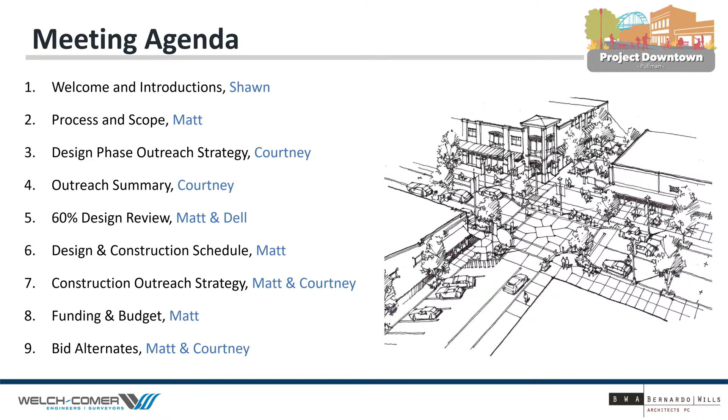You've all seen this slide a few times now - just a quick reminder that this is a long process. The lifetime of this project is measured in years at this point. Where are we at? We published the master plan a couple years ago, finished the concept design early last year, and now we're in the throes of the design phase, with every intent to be building something this late spring and summer. I'll show you a schedule here fairly quickly.

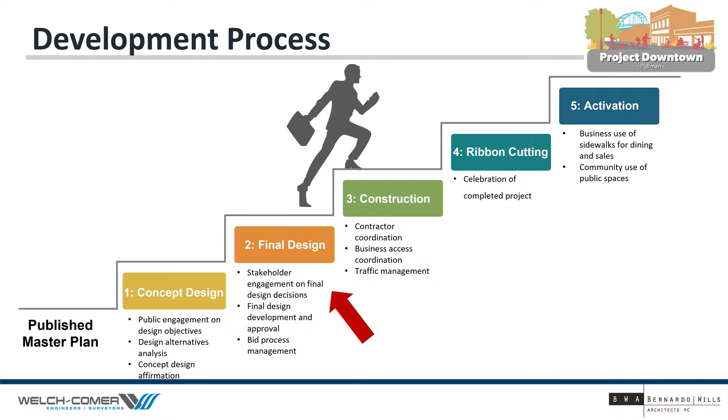From a scope standpoint, again, I won't belabor this too long since we've talked about it many times. I'd say the premier project - in terms of cost and length of time from a schedule standpoint - is Main Street. That's the main project. We also have Grand, which is mostly everything but the asphalt, so the sidewalks. There's also some trail work up on Davis, some work on Olsen Street, which I'll get into as we go through the presentation, Pine Street Plaza, and then pavement marking changes on Pine and Kamiaken, which is what we talked about last time. I remember it was really cold outside when we last met.

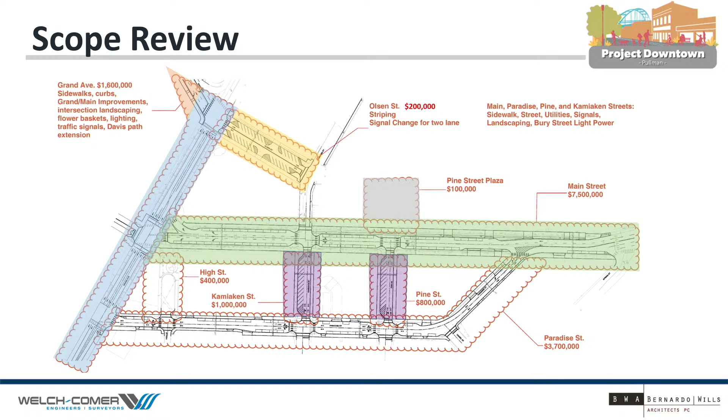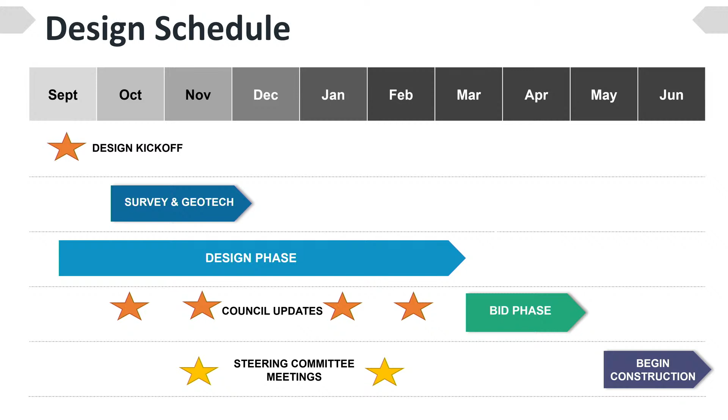From a design schedule standpoint - this is not the construction schedule - we're right in the middle of January. This is our third presentation before you, our third update. Later this month we'll go back to our design steering committee and ask them for specific feedback on things like what the lights should look like, and what color palette our surfacing should be, whether colored concrete or clay paver. A lot of those details, we're finally getting into. Then we'll be back before you the last day of February for what we'll call a 90% presentation and essentially an authorization to go to bid. Then we'll bid, and probably start construction shortly thereafter, which I'll cover later on.

I'm going to quickly turn it over to Courtney to talk about our engagement during the design phase. Good evening, Mayor Johnson, members of the Pullman City Council. It's a pleasure to be here with you in this new year. As you'll recall, Phase 2, the design phase public engagement, is primarily focused on raising community awareness and anticipating and mitigating construction challenges, doing that in a way that is very collaborative with the stakeholders, the steering committee, and the council.

This is a time for our consulting team to work with those property owners who will be impacted, to make sure that they're aware of opportunities they might want to take advantage of, like putting in a fire line or a grease trap interceptor if they're thinking about enabling a restaurant use in their building. It's also a great time to work with our partners at the City of Pullman.

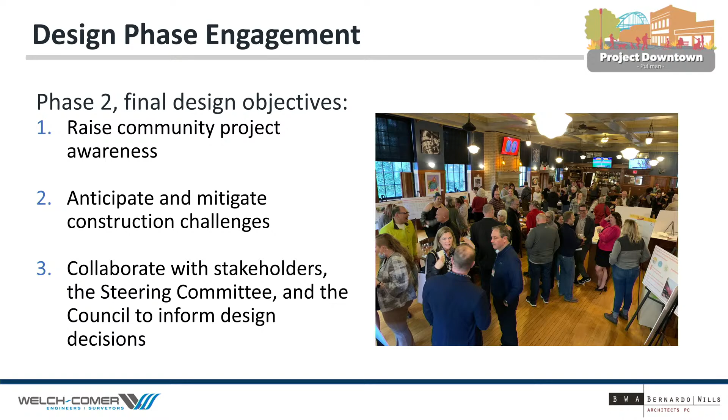I'd like to thank Jennifer Hackman, the City of Pullman's Economic Development Manager, Marie Dymkoski at the Pullman Chamber, and Holly Greystone at the Downtown Pullman Association for their thoughtful and proactive collaboration on making sure your downtown businesses have all the tools available to anticipate the impact of construction. It speaks to the care those professionals put into their community that we're meeting every other week to touch base about what tools and resources are available, and asking those stakeholders what they might need that we could find resources for.

With regard to those steering committee meetings, we're working through final design and construction phasing recommendations. We appreciate the opportunity to work with the steering committee. They have an inherent knowledge about the neighborhood that is really helpful for us. The stakeholder engagement has been really effective.

Some of you attended a really great meeting here on December 14th with property and business owners to talk about both the design elements, but also looking ahead to what construction looks like. We're still at a point where we can predict and anticipate challenges and swerve to avoid them, so to speak, because there will always be challenges during construction. Through that engagement, we're really able to identify hurdles and work to overcome them.

The community will see general updates soon on the website, and these city council presentations are a really effective way to let the community see the process that we, the City of Pullman, and your consulting team have gone through to get to this 60% complete design.

With that, I'm going to turn it back over to Matt, and just say that we've got some really fun images to show you.

Thanks, Courtney. So as I mentioned, we're about 60% of the way through design, and in most projects, early in design, we get to show beautiful pictures and concepts and whatnot. As we move deeper into the nuts and bolts, the products tend to get more utilitarian. It doesn't mean they're not important - they're very, very important, just sometimes less flashy. So we spent a little extra time developing some ways to show our progress, rather than just a black and white set of plans.

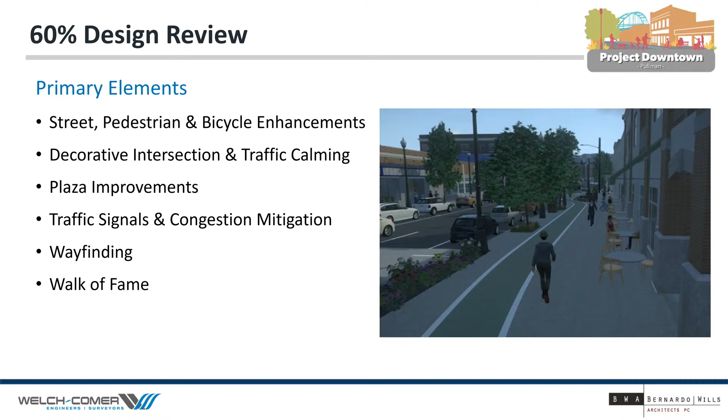We'll go through several of these items. Some of them will be plans like this, but I'm going to cover Main Street first, and I'm just going to talk about what's between the curbs. Really what that means is the curb alignments, the center line alignment, and the lane configuration.

If you remember, there are going to be some changes to the lane configuration. We will keep 3 lanes on Main Street between Grand and Kamiaken, but then we transition to 2 lanes as we head east. I realize that's opposite to traffic, but we're 2 lanes from Kamiaken to the very east end of the project.

There are several changes to the curbs at the intersections where we've introduced curb bulbs to better define where the parallel parking lies, and also to shorten the crosswalks, as we've discussed before.

One item I'd like to point out in green here is the bike lane. We've worked very closely with the DOT and staff to figure out how to accommodate multi-uses, and bicycles are certainly one of those. The design ended up landing where the bike lane is up on the sidewalk in a specifically delineated facility. It does venture back onto Main Street at Kamiaken, and then they're pointed north on Kamiaken to push them up to campus.

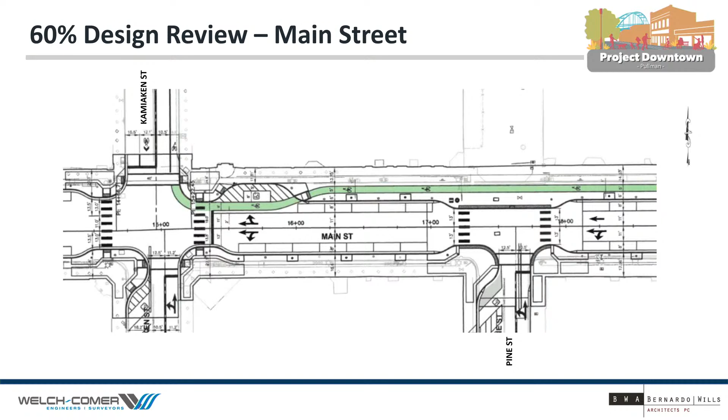Some of the questions were, well, why doesn't the bike lane stay on Main Street all the way to Grand? From a safety standpoint, and the DOT agreed, that just wasn't a safe situation. So this is what we feel is the best solution from a bike facility standpoint.

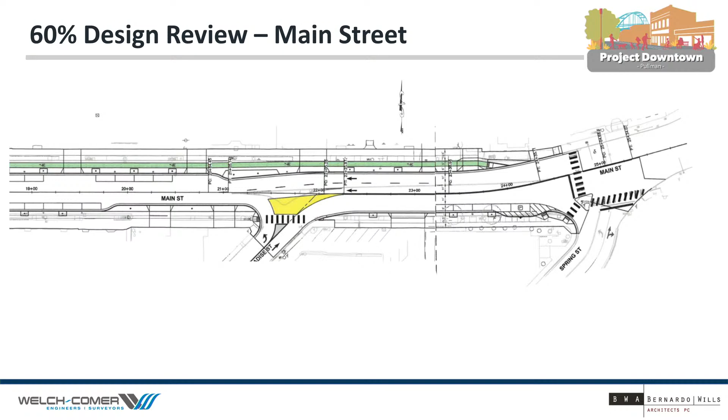I'm going to turn it over to Dell to talk through some of the probably more interesting stuff that's outside of the curb. So, Dell?

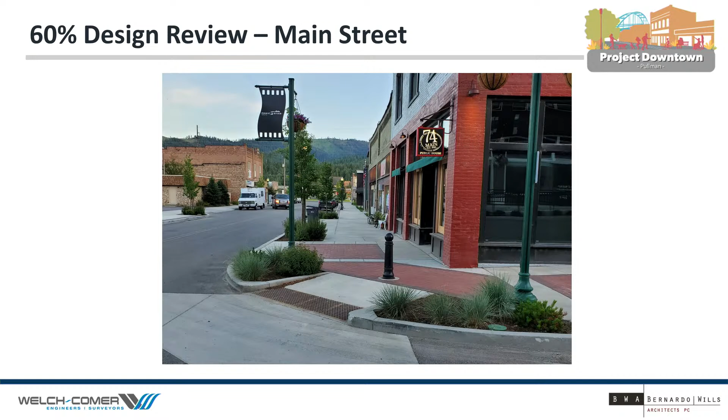Okay, we're going to show a series of 5 or 6 animations that I think will help you visualize what this may look like. If you'd like to see them multiple times, just let us know, we can go backwards. The first one will be an overhead view starting at Main and Grand and essentially flying east, looking straight down, so you'll see all the character of the improvements here.

So that's Main and Grand there, the busiest intersection. Here's where we have the 3-lane section between Grand and Kamiaken, with slightly narrower sidewalks because of that third lane. There's the Kamiaken intersection where we lose a lane, and this is where the bike lane meanders back onto the street to avoid pedestrian conflicts, then sends them north on the dedicated Kamiaken bike lane.

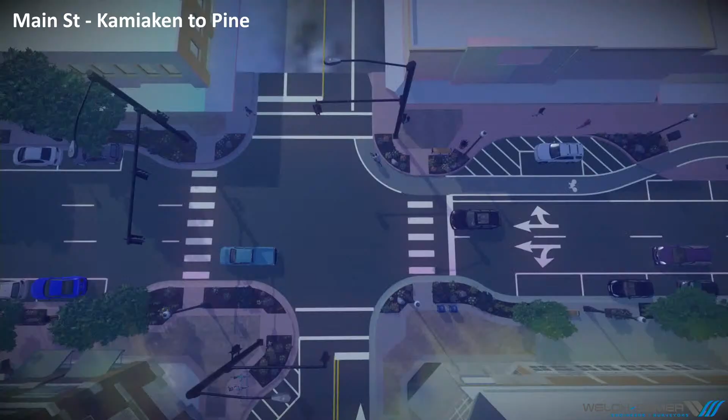This next video picks up right where this one leaves off and continues to the east. So we have much wider sidewalks on both sides, and you see the green bike lane—that's the Pine Street Plaza. I might play this one again since it went by a little fast.

You see all the trees and the lights, and there's Pine Street Plaza there. Again, we carry on the 2 lanes.

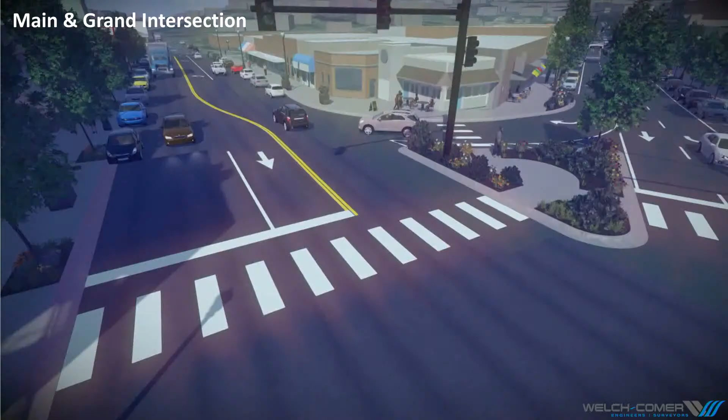This is Main and Grand looking north and east. Pretty quick video - that's traffic driving at you from the east heading west.

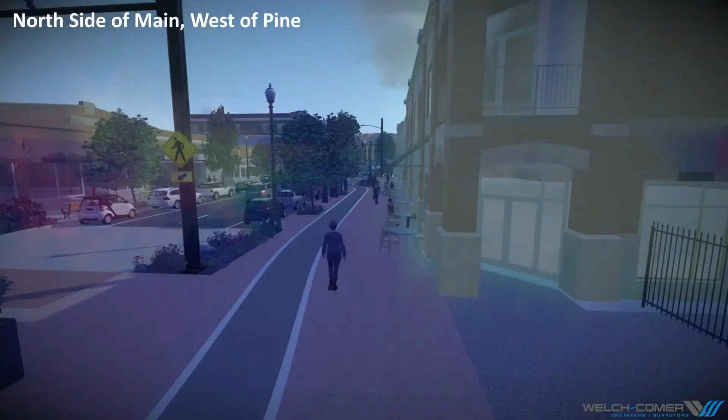This is north side of Main, west of Pine, walking west, where we have the wider sidewalk area. You see that bike lane there - let me play that one again. You see the planter areas and the trees and the bike lane. Plenty of room for tables.

This next one is a block to the west, where we're back to the 3-lane section. It's a little bit shorter video, but you'll notice that the sidewalk is narrower because we have that extra lane. But it's still wider than it was, slightly wider than it was.

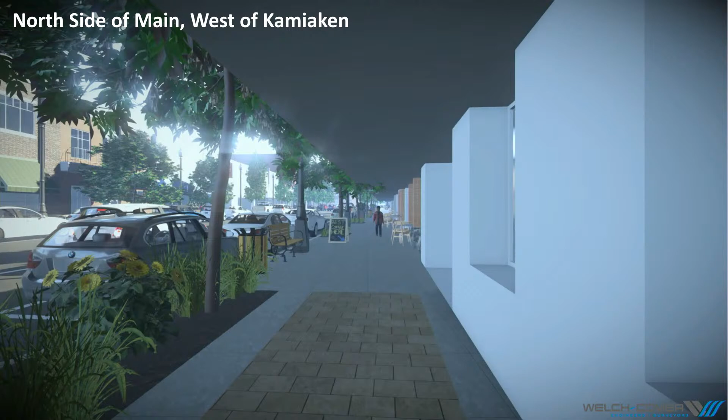Would anyone like to see those again? Yes? Okay. Can you show more east, because it's very unclear where it ends, where this starts, like where the actual improvements are starting?

From Spring Street - where do you start? Oh, that last video? Yeah, I'm hearing the assembly. So it starts right, it's just out of frame, right below where - it's right at Spring Street. That's Roost and Bell Tower on the left.

So it does not start at the visitor center? No, the animation does not start there. Where does the work start? On the drawings, at Spring Street - currently the work starts at Spring Street.

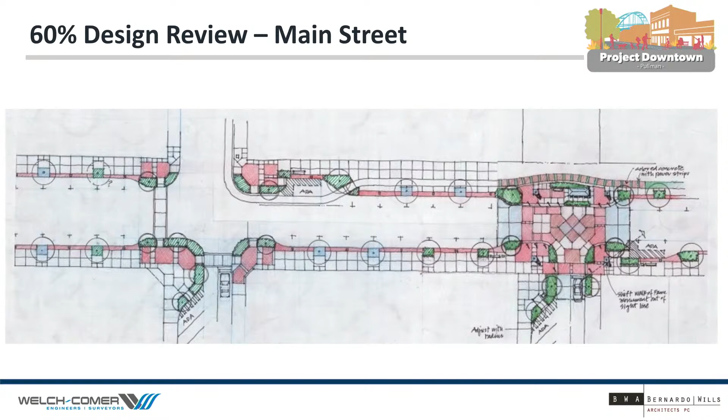That's my big thing, it's like connecting the crosswalks and everything - I'm down there as well, so I know what Judy's talking about. So the sidewalks at that intersection, will things get improved there and have the same type of bump outs and all that?

Yeah, that's a pretty good representation right there. You see that just on the right, maybe this will work. There we go - so here's Spring Street. And so right now, the proposed east limits of construction are the west limits of that intersection. I may have said east limits - I meant west limits, so it's not the east.

Visitor center and it's not doing that weird crosswalk - that's pretty dangerous. There's those weird lights, different streets, people get a walk signal and they go and cars don't think, so they're looking against the wrong light.

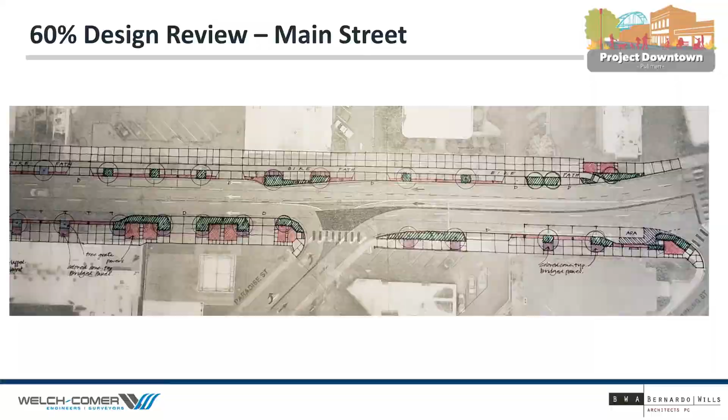That wasn't allowed to connect to the visitor center as well. Matt, we didn't talk about that in the meeting that much, but that intersection and then the Spring Street where Paradise intersects with Main, or merges back into Main - those are problem areas. For any pedestrian, people speed up right there, and that turns into a speedway - that little section to the bridge is all of a sudden a really fast area.

Well, that's great feedback. We can circle back with staff and see if there's opportunity, see if we need to expand a little bit - happy to do that. So I don't want to waste your time, so if you'd like me to go through these real quick, happy to do it, or just tell me to move on. Either way is fine. Yes, ma'am.

I just have a quick question - I noticed that you've got the parallel parking spaces delineated. Is that going to happen? I don't know that yet, we've been talking with staff about that. I don't know if Sean has resolved that at this point, but just because they're shown here doesn't mean we're proposing that. So that's an option, certainly, if council would like to weigh in, we'd love to hear your feedback on that. I think there's an option - if we don't paint those, it's easier from a maintenance standpoint, but it also allows more flexibility for the cars and where they park.

In this case, we're locking in where the cars park, and there's also a question of how long you make those spaces. Of course, we have a lot more pickups in Pullman, so we'd have a tendency to make some of those longer and then maybe have some compact spaces. But my leaning, and my recommendation, would be not to paint those spaces. That's partially from a maintenance standpoint, but partially to allow flexibility in how the cars are laid out. I think we've heard before from a previous Public Works Director that they could get more cars in there when they did not delineate it. That's correct, yeah.

Thank you. Matt, I have one question on the bike path. So you're saying that from Spring to, I guess, Kamiaken, there is a bike path on Main Street, but then it'll veer off and the bikes have to go a different path. They can't continue down Main Street? They can, we're just not providing a separate facility for them. So there will not be a continuing bike path all the way through Main Street? Correct.

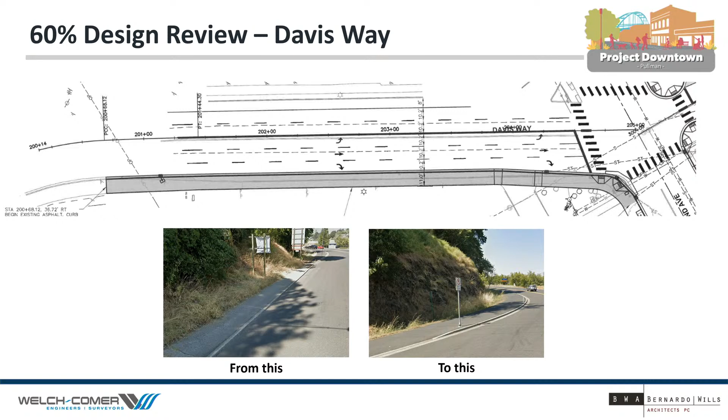Davis Way scope is smaller comparatively. Right now on the south side of the roadway we have a 4, 5, 6 foot sidewalk. Our intent is to remove that and replace it with a nice wide shared use path, 10 to 12 feet wide, to match what's already there further up the road. Along with that, we're proposing removing a few parking stalls on the south side so we can add a dedicated right turn lane to help with traffic challenges.

Olsen, also in comparison to Main, is smaller. There are 3 primary elements. One is pavement marking changes. Like Grand, we're not removing and replacing asphalt or roadway, but we're going to remove the parallel parking stalls and restripe it to angle parking. I think that gains us about 8 stalls downtown, which is great. Also, those shaded areas on the ends of Olsen are new curb bulbs, which will help us be ADA compliant and shorten the crosswalks, improving pedestrian safety significantly. There will also be some signal work at both ends.

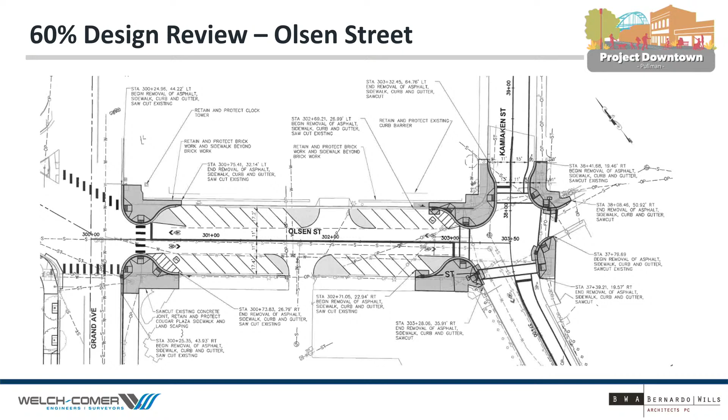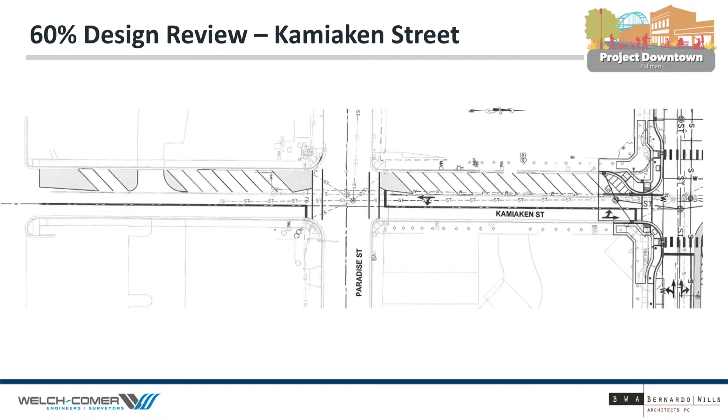That's Olsen. Then both Pine and Kamiaken, the same, at least from Main Street south — really just pavement marking changes, going from parallel on both sides to angle parking on one side. You might notice the parking extends south of Paradise. We're doing that because we need the intersection to line up; otherwise there's a weird shift nobody would be happy about. So that's Kamiaken — Pine's almost identical, with that change there.

Over the last couple meetings there's been discussion at this level and the staff level about ADA parking. I reported last time we're following a standard acceptable to staff — essentially providing one ADA accessible stall per block associated with our project, and we are doing that. This is an older image; there are some small modifications as the design progresses, but for discussion purposes that hasn't changed.

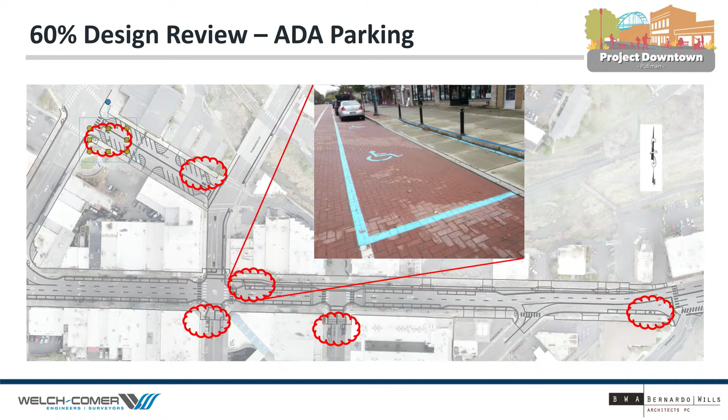This becomes a bigger deal when we think about Grand. With the DOT, we know in 5, 8, 10 years they could be knocking on the door saying your level of service has dropped enough that you've got to convert from 3 lanes to 5 lanes, which means losing all your on-street parking. Doing things like this might delay that — I don't know how long, but it moves us in the right direction.

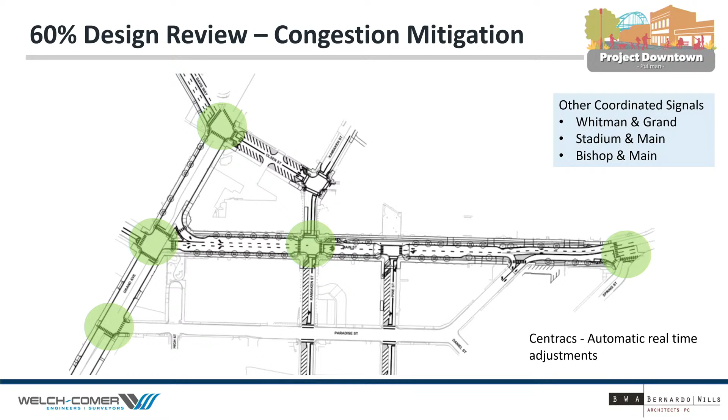This is an idea I think you're familiar with, one we've spoken about in the past. As part of limited improvements we're exploring for Pine Street Plaza, some of which may deal with running electrical lines underground to get lighting to certain points within the plaza. We've also spoken about including a small children's play area or structure. But another idea presented was, is there a way to engage more activity within the plaza by inviting people closer to the river? Through our public meetings held as part of the concept plan, there were a lot of comments about having this natural asset, this river, right in our downtown.

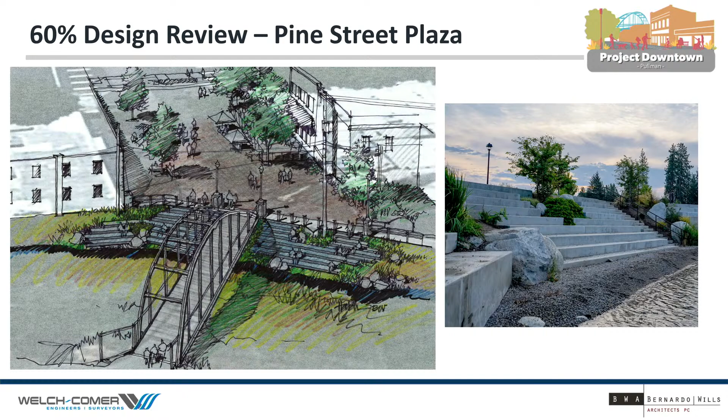Matt mentioned that we're anticipating meeting again later this month with our steering committee. At this stage we have the framework of the street layout, the sidewalk widths, and all of the utility aspects like lights positioned on our plan. Now we're going to start looking at the proper character of those street furnishings.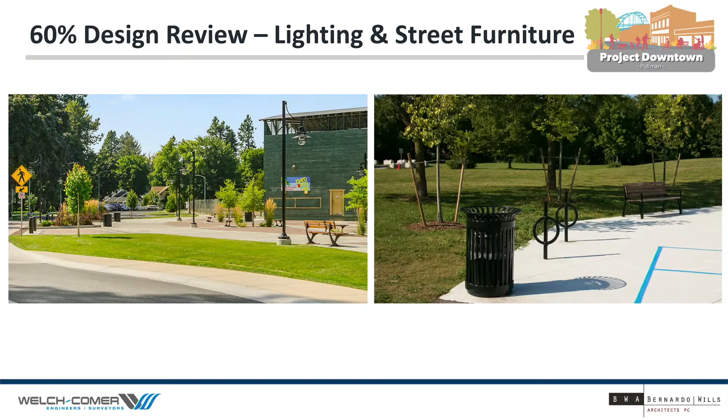And the blue, since our pointer's not working, let me see if I can... Matt, how did you— there we go. If I can point out here, let's see. Oh. I'll get it for you here.

There's a square right there, with a corresponding one across the street here, and across the street here. That's where we're looking in general to place what will now be more of a vertical element, the Walk of Fame. There are 4 categories, and each of these locations would be a specific category.

You can see that the way we're looking at placing them, there's plenty of room around them so that we can have panels displayed on multiple sides, long enough for additional names in the future, and with ADA considerations for movement around them.

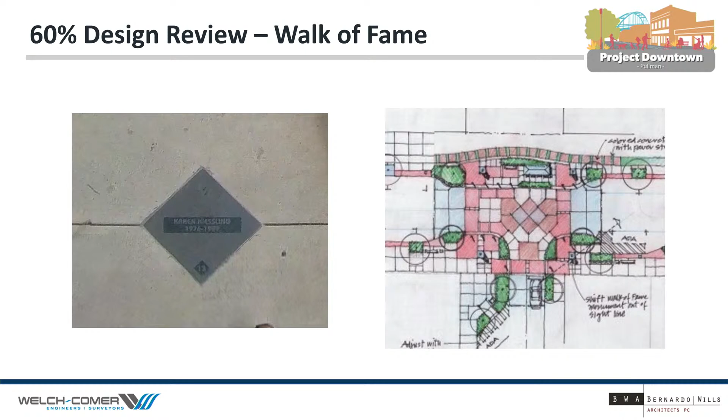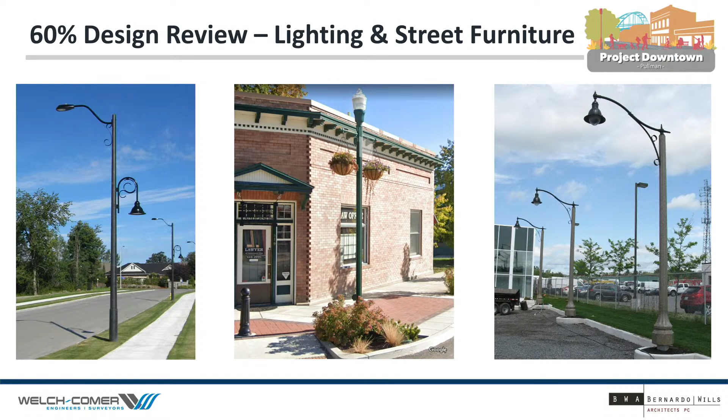We have some other signage elements that we talked about with regard to directing visitors and vehicles for where they can access public parking. There's also, as part of the overall construction package, an overall signage plan with street signs, things like that. Now that we have this information, they got it to us a couple of days ago, they've shared with us the character of what they think their kiosks should be.

We talked a little bit today about the opportunity to potentially work with the design of the kiosk to also maybe have some of the character elements of what we're talking about with the Walk of Fame. One of their examples they showed us had that opportunity, so that those elements might have some similarities and be readily distinguishable.

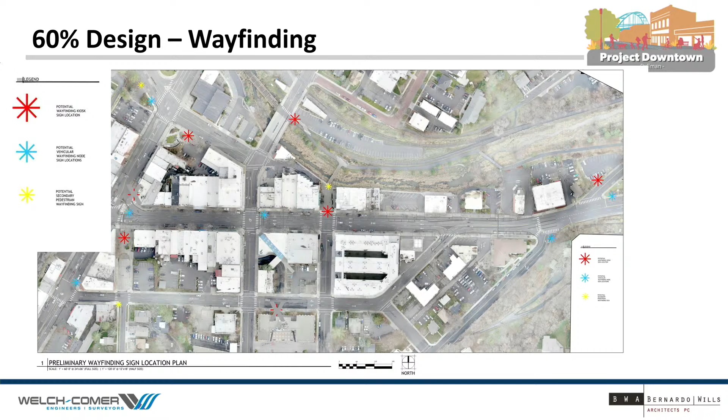Any questions on that? Okay, I'll turn it over to Courtney.

As we continue to move through this final design process, there's a lot of stakeholders to communicate with. One of the really important things for this community to understand is that everybody plays a role in the project going well, and that at the end of the day, the project is successful in 2 or 3 years when we see those sidewalks alive and vibrant with business and community uses.

So in terms of construction, we're able to control and anticipate things to a certain extent. We work with the City of Pullman to write the contract in the bid document. It's up to the contractor to execute the contract, and it's up to Welch-Comer and our engineering inspectors to enforce the contract. So part of what's been really helpful in working with our colleagues is to anticipate what the community is concerned about so we can write that into the contract.

The meeting that we held here in December was really helpful in gathering information about the things that need to be specific to Pullman in that contract. We're really grateful to the community members who participated, and again, grateful to those partners of the City of Pullman, the Downtown Pullman Association, and the Pullman Chamber.

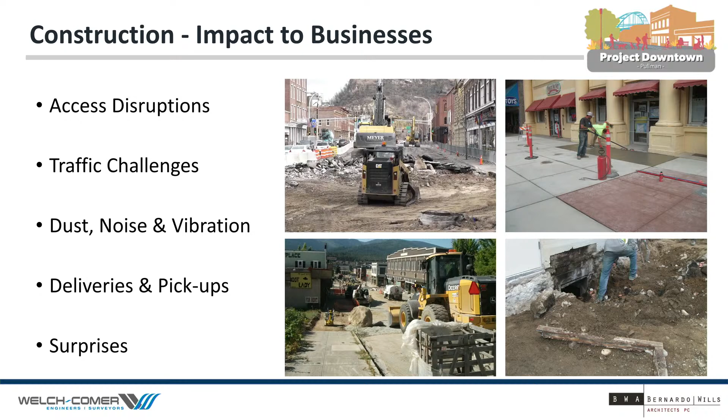But we know these things, we know we're gonna encounter these things, so how do we mitigate them? Because we are very sensitive to the fact that we are here and we're doing this project for the business owners. So it's important, we understand the importance of doing what is possible to make this as painless as possible.

And so one is communication, as Courtney mentioned, that's critical. We'll be outreaching to the public in any number of ways, which I'll get into in just a moment. Things that we can do to maximize access to businesses.

One example is we could tell the contractor, okay, the site is yours. You can tear out all the sidewalk, and then 12 weeks later, you can put back all the sidewalk. That's not gonna work because people can't get into Pups and Cups or wherever.

Instead, I think what we need to do is something more like, okay, Mr. Contractor, you have access to one block at a time. In fact, you have access to the north side, one block at a time. So you can come into that block only, tear out the sidewalk, but you have to stay right there. Then you do your grading, remove some tree roots most likely, form the sidewalk, pour the sidewalk, let it cure. And maybe you're not doing all 15, 19 feet, maybe it's 7 feet wide up against the building, but then you open it back up to pedestrians so people can get in and around.

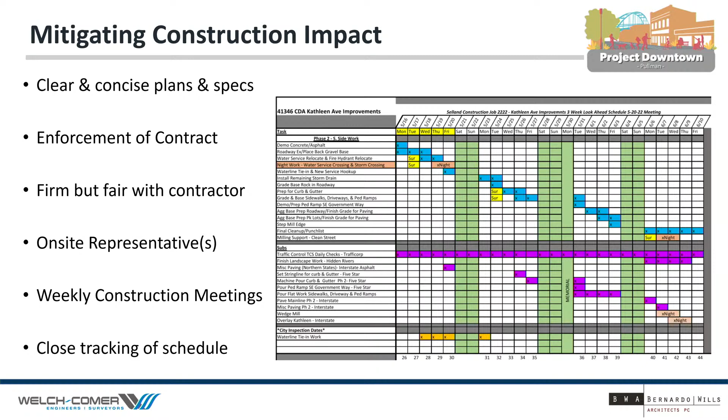There'll be weekly construction meetings with the contractor and their subs and all the utility companies, where we hash out all kinds of stuff. Some of the most important things are: what surprises do we need to know about? How's our progress going? What will we be doing in the next couple of weeks? And so we track all that very, very closely.

It's yet to be determined exactly how we get the word out on what the contractor will be up to in the coming days or weeks. One tool that we found very effective is a newsletter that we send out, typically once a month or every two weeks. For this type of project, it probably could be every two weeks, but we can share as much information as we know. It can be a newsletter, a press release, or a social media blast. However the city wants to do it, we're happy to conform with whatever works for you.

Any questions on that? That was pretty quick, but any questions on what's coming?

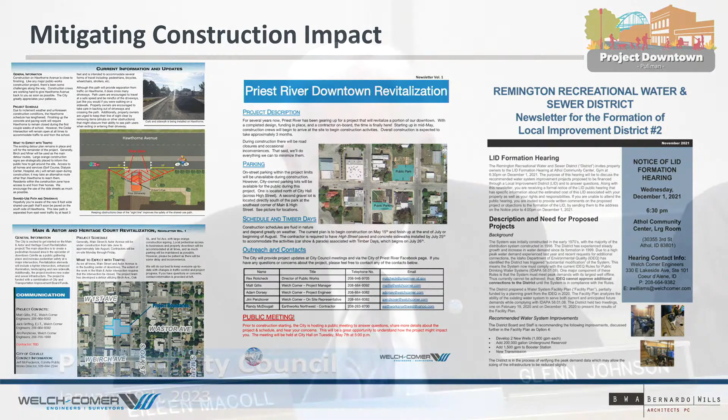One thing I see on the west side, and a lot of times in WSDOT construction, is they'll have their signage out several weeks before the event's going to take place, so people know that this off-ramp is not going to be used. Are you going to try and use WSDOT since they have signage like that? We can certainly do that, and it may be easier because it's their road. Yeah, you bet, you bet.

One part of this project we would really like input on is what is closed and what is open. There are a couple ways to look at how we build. Think of Main Street right now. We could say, okay contractor, you have to keep one lane or two lanes of traffic open on Main Street at all times during construction. They'll say okay, but that will drive up our price and lengthen our contract. But there's still traffic, some access from a vehicular standpoint through Main Street.

We recommend, and it's easier for me to say since I'm not the policymaker, essentially ripping the Band-Aid off as quickly as possible. We close Main Street to vehicles. Pedestrian access will remain, but we close it to vehicles. We work through things like deliveries, emergency access, mail delivery, those types of things. We run two-way traffic on Paradise. We've worked this out in concept with the DOT and this is acceptable, though we've got some details to work out.

So Paradise becomes two-way. There becomes a temporary signal set up at Paradise to accommodate the new direction. We've got some turning movement challenges, especially for trucks, so we would have a temporary truck bypass on Spring, to get trucks through the site so they don't find themselves trying to turn here. They can do it, it's not like it'll be gridlock, but as many trucks as we can keep out of this area, the better. So this is probably the first time you're hearing about this idea and proposal.

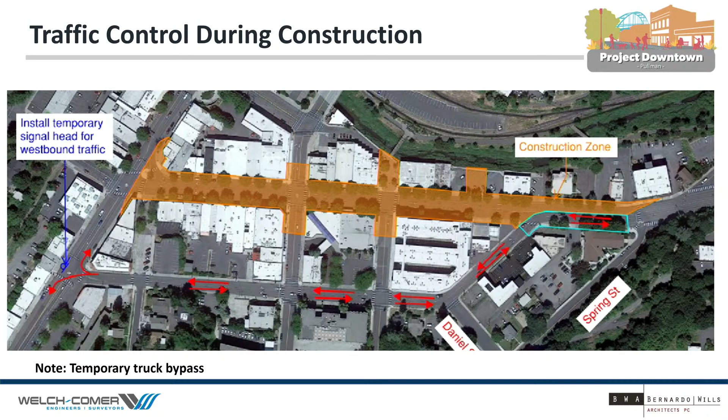Construction schedule and timing—this is preliminary at this point. We've got a little bit more thinking to do, but we anticipate a contract award in late April at a city council meeting. The contractor would likely mobilize to the site mid-May. We wouldn't have them do anything until school's out, but they might start taking down light poles, bike racks, garbage cans, and those types of things. Then when school lets out, we give them the site, and then they go to town.

So the end of May through the end of August, we think we can get to what we call substantial completion. What that means is the project is done enough to give the public access to it—cars are driving down Main Street, people are on the sidewalks. What might not be completely done is maybe not all the lights are stood up, maybe the plantings aren't quite done, maybe some areas of the clay pavers are still fenced off because they're not completed yet. But it's essentially open to the public. We think that can be done before the first home football game, which we understand is a big deal from a Main Street standpoint.

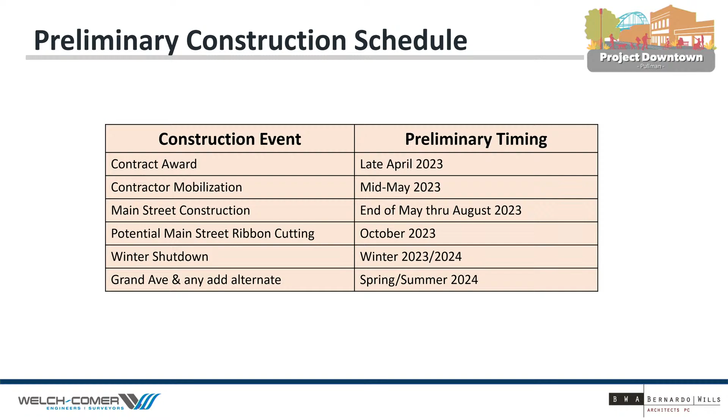Just watching what they've done and what they put together, I don't know how you guys are reacting, but I haven't heard any negative stuff. I hadn't seen this, and this looks really good compared to what I thought it might be. So if this can really happen where you're shutting down Main Street, doing it in segments, I think that's a great plan to do the sidewalks and everything. I've done construction, not this large, but I understand the need to keep things tidy and neat and keep your contractors doing things, but you really need to make sure they're not leaving a big mess along the way, because there's going to be businesses open, right?

The strategy of doing the sidewalks incrementally from start to finish, instead of tearing the whole sidewalk up all through downtown, seems like a really good plan. And telling the businesses, communicating with them on when they're going to do it, the best you can, is going to help a lot, because then businesses won't be asking what's going on, and you'll have fewer complaints coming to your office and to the contractors.

But the dates they have up there, if I was in a committee meeting right now, I'd say the same thing I'm about to say: that's very impressive, actually doing it during the summertime. Getting it functional in August - from what I'm hearing from Matt, the goal is to get things somewhat functional at that point, then wrap it up for winter without a mess, and restart on Main Street, getting that done, then doing Grand Avenue the following spring.

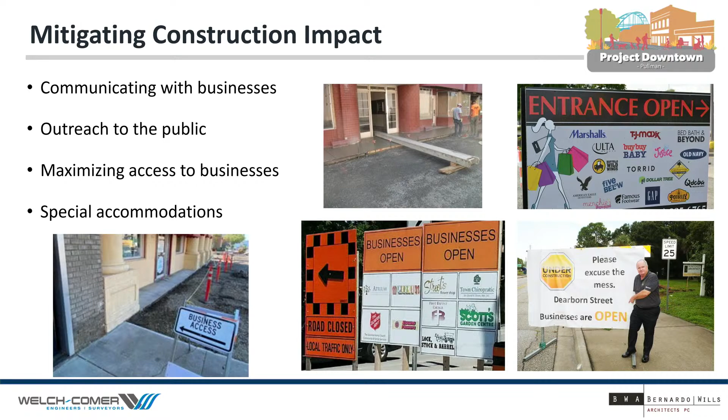Oops, yes. So I think something like this, the bottom middle photograph, right? I don't think that is a stretch to have that in the contract, actually, to provide things like that. Now, if businesses want to have sandwich boards outside their place, that would clearly be on them. But something like that seems reasonable to me.

Any other discussion on the schedule? Okay, so we're almost done.

So next meeting, between now and the next meeting, we will have talked with staff quite a bit about funding and the construction costs. Frankly, the construction industry is kind of the Wild West right now. It's expensive, and sometimes more expensive. So we'll be having those conversations. We'll come with a full report next month, into next month.

When we do come to you, we will probably be asking you to help us determine priorities. And the way we avoid boxing Pullman into a corner is we establish what we're pretty sure we can afford, okay? Based on our estimates, we think we can afford this element and that element, and we call that the base bid. And then anything beyond that, we call those add alternates. And so we design them and we bid them, but you don't necessarily have to award the alternates if you just don't have the funding for it.

And so we'll come with a recommendation, but there'll be a short discussion about if we have to prioritize those. Did that make sense? Okay. I don't have any detail yet, but we will have a lot of detail at the next meeting.

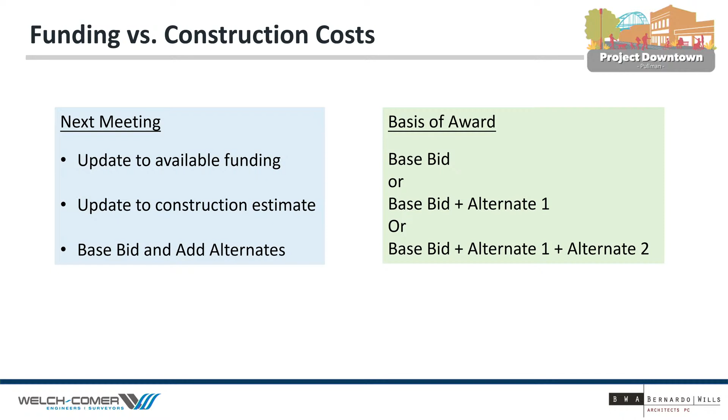Just a follow-up question. Is there anything that has been previously talked about in meetings that has already been moved and taken off the table, or is everything still as originally communicated? I'm hearing some rumblings of people saying things have been taken off, and I'm not seeing anything taken off, so that's why I wanted to ask. No, sir, the only way something would be taken off the table is at your direction. Great, thank you.

Okay, last slide. This is just a quick reminder of where we're at. We'll be meeting with our steering committee later this month. I can already tell that's going to be a great meeting. We'll be back at the end of next month, I think February 28th, for a 90% presentation, and then we're onward. So with that, I'm happy to answer any other questions, but I think we've yammered on enough.

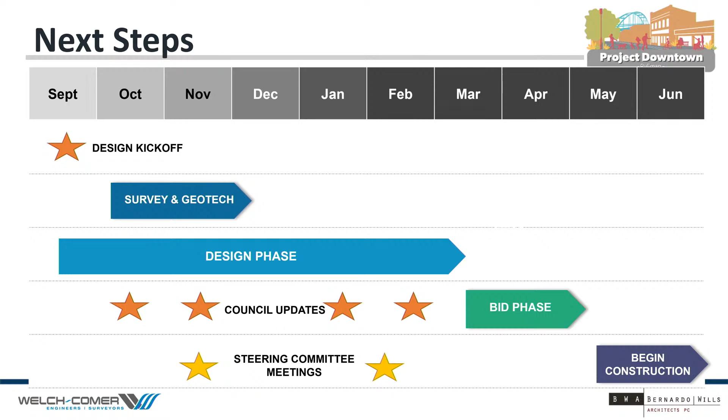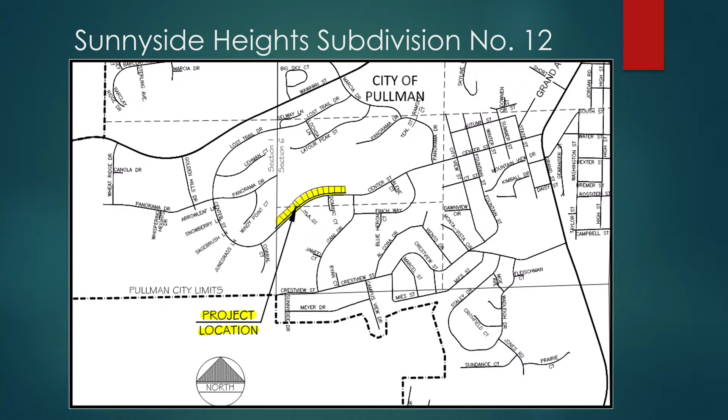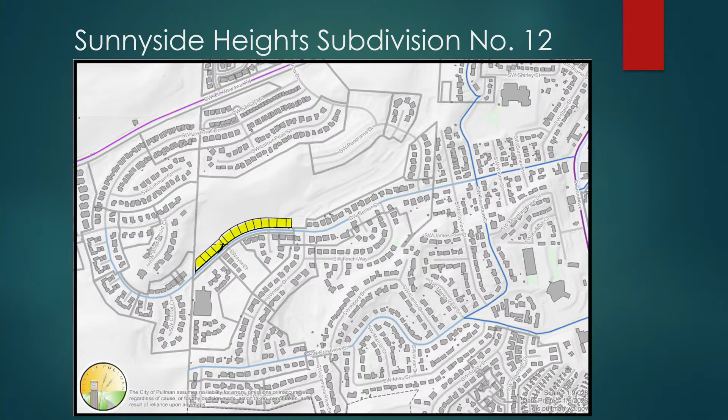On this slide, I'm again showing that subdivision in yellow, and pointing out that this is the last section along Center Street that is undeveloped. So this will fill in that gap. The total area is right about 3 acres.

At this current stage, not all of the subdivision improvements are complete. So in order to guarantee construction of those remaining improvements and warrant their maintenance, the developer has been made aware of the security that's required, and they have executed a letter of credit, which is included in your council packet.

Also, to note, all applicable conditions from the preliminary plat are being satisfied with this final plat and the construction of those deferred improvements.

Lastly, since this subdivision was vested in 2017, at the time of the preliminary plat submittal and approval, it is vested under the standards at that time requiring just a 3-year time frame on sidewalk. This is the last development that Itani has under that old 3-year rule. All future final plats they look at will be under the 1-year rule.

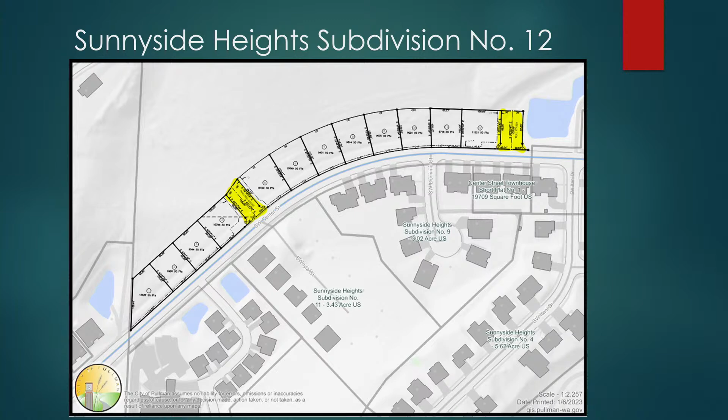Any questions? Eileen? Just to clarify for the public, Itani's intention for this is single-family homes? I believe they're going to be doing duplexes and some townhouses.

Okay, because I know that's going to come up, and I noticed the size of these lots would certainly accommodate that, even a triplex, or maybe even a quad at 9,000 square feet. So there's probably more to the story here, but that's where we're at for tonight. Thank you.

Any other questions? If not, do I hear a motion on this resolution? Move to adopt resolution number R-3-23. Second. Moved and seconded. Resolution number R-3-23, a resolution approving the final plat of Sunnyside Heights Subdivision number 12 and authorizing the mayor and the Finance and Administrative Services Director to sign the final plat. All those in favor signify by saying aye. Aye. Any opposed? Okay. Thank you, council.

Discussion items. We do have one council member who could not make it here tonight, and since we were talking about boards, commissions, and committee assignments, it was suggested that perhaps we could do this discussion at another council meeting. We have a workshop planned for next week where we'd have time to talk about it, and perhaps Nathan should be healed up by then and could be here. So if that is okay with the council, let's talk about that next time, so we have all the council members present for that.